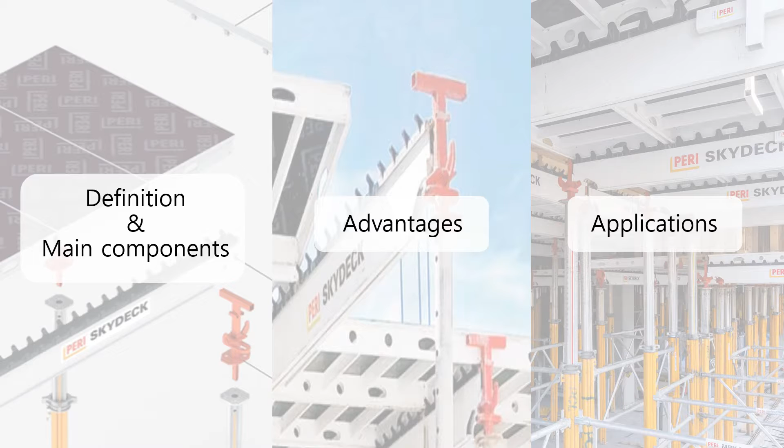In the first week's presentation, we investigated skydeck, one of the construction methods used when building. We studied the skydeck's definition, main components, advantages, and applications. However, the presentation focused only on what skydeck is, so we got feedback from the professor that we set the wrong direction.

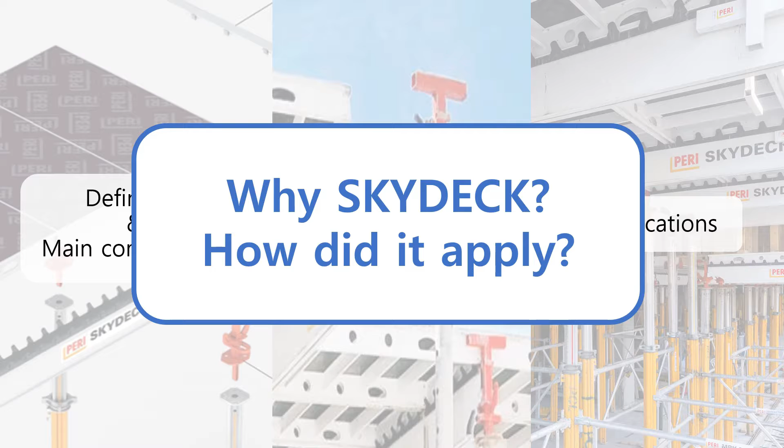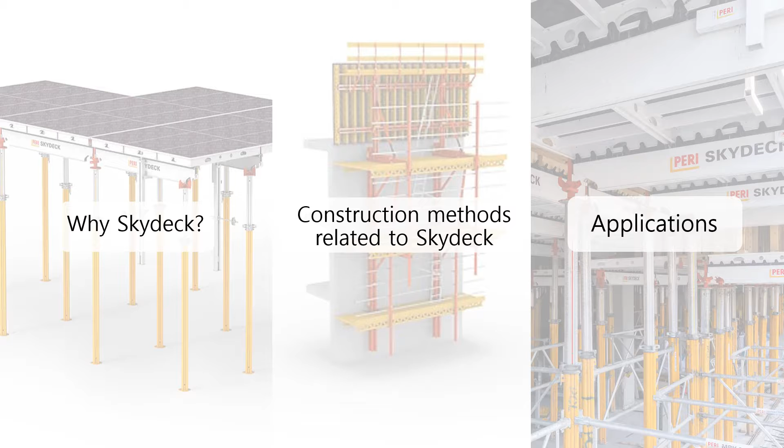So we are going to use this bonus week to find out why the structural engineers had to use construction methods related to skydeck and how they were applied in connection with the absolute world towers. So we changed the content to why skydeck had to be used and construction methods related to skydeck and how it is applied to the absolute world towers. Let's start this week's presentation.

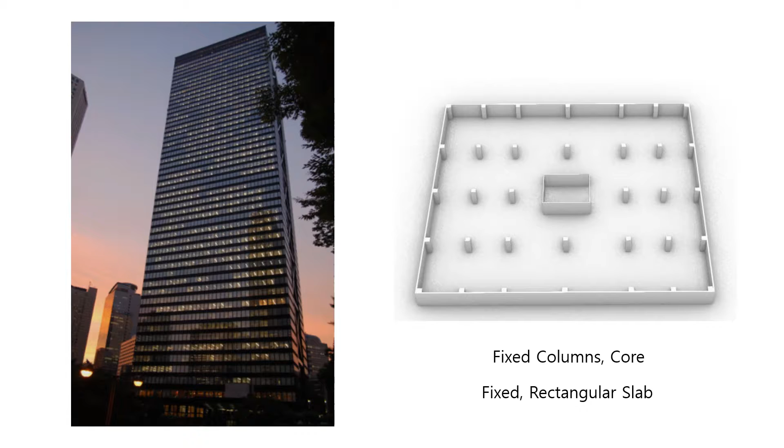Typical buildings have fixed columns and cores, and rectangular slabs are stacked up one layer without rotating. Usually when constructing slabs in these buildings, flying table techniques are often used. The flying table technique is to move slab molds with a crane.

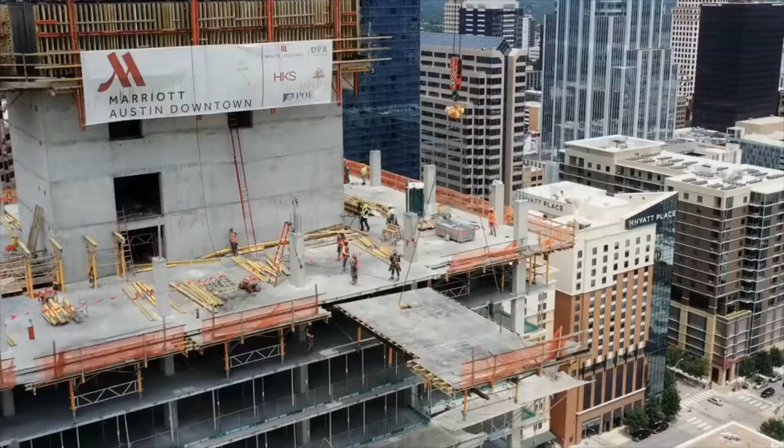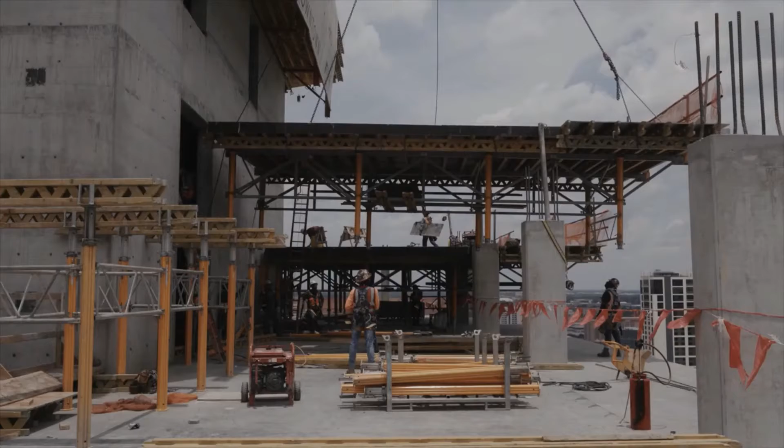However, the absolute world tower has fixed columns and cores, but it has an amorphous slab rotating structure. Engineers designed elliptical slabs so that all floors have different angles to create a building that looks flexible on the outside. As the layer goes up, the angle rotates, and the size of the angle is different.

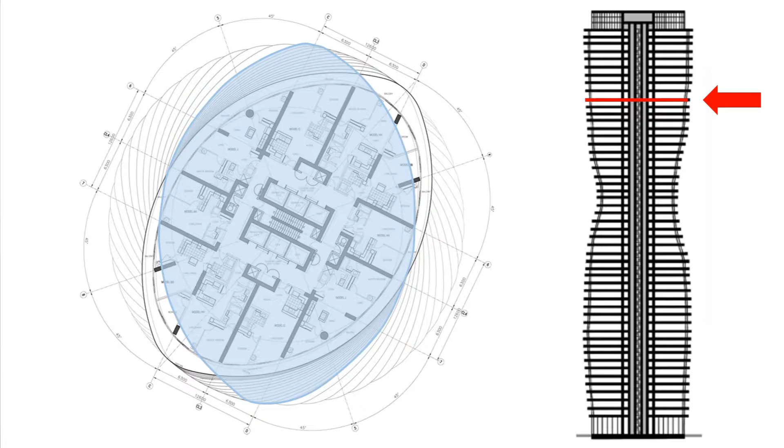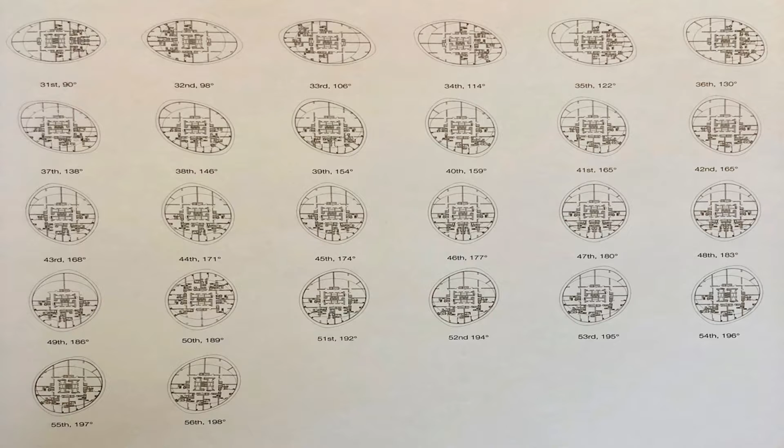Because every floor has a different angle, engineers had to set the exact angle for each floor to achieve structural stability before building. If this angle is slightly different during construction, there will be structural problems. The flying table technique, a common slab construction method, was not suitable for the Absolute World towers, which required a stable and accurate angle.

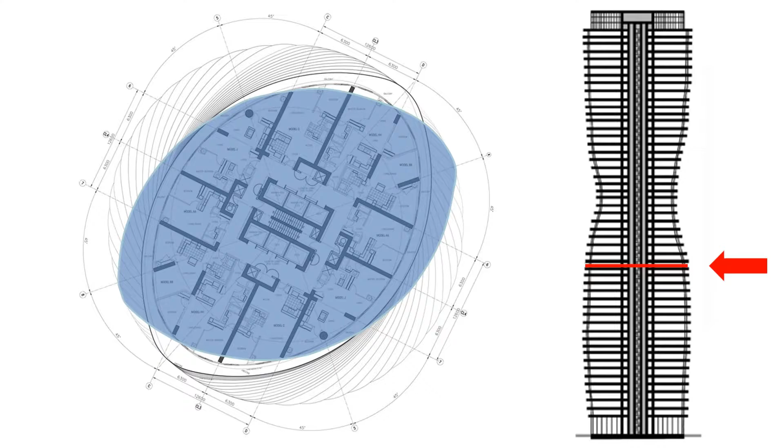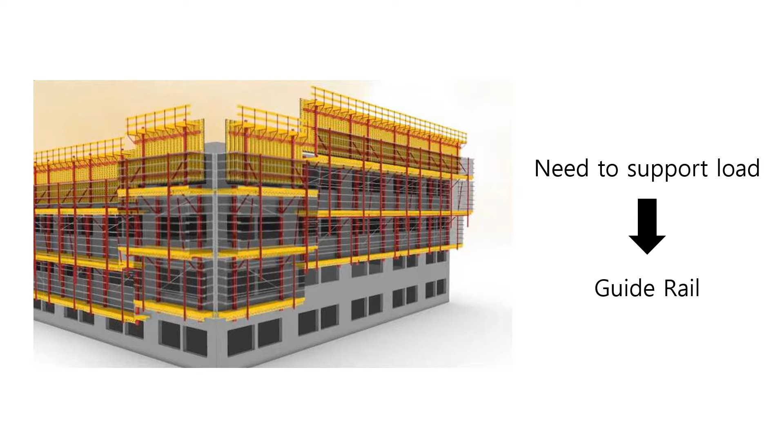Also, because slabs have different angles on all floors, there were parts that could not move the machine or support the mold during construction. That's why structural engineers needed guide rails so that they could move it at different angles, supporting the load on the machine or the mold.

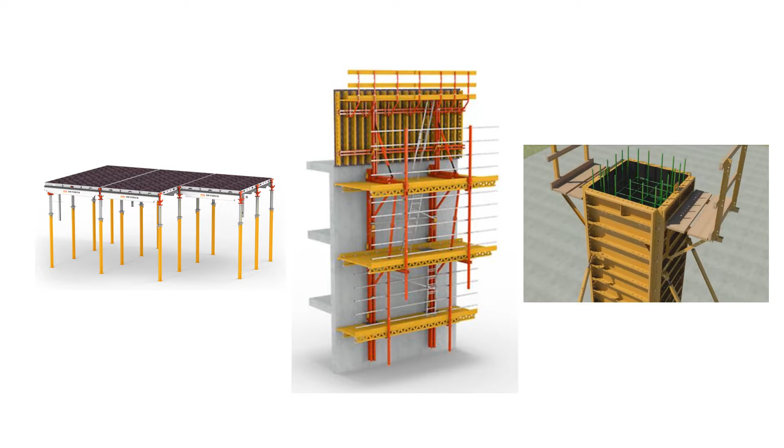How did structural engineers solve these problems? The answer was these three methods. These are the three construction methods that we studied this week. Let's take a look at each of them.

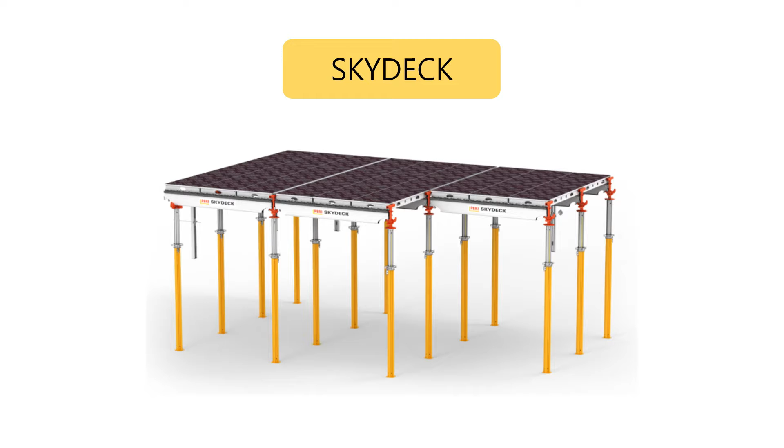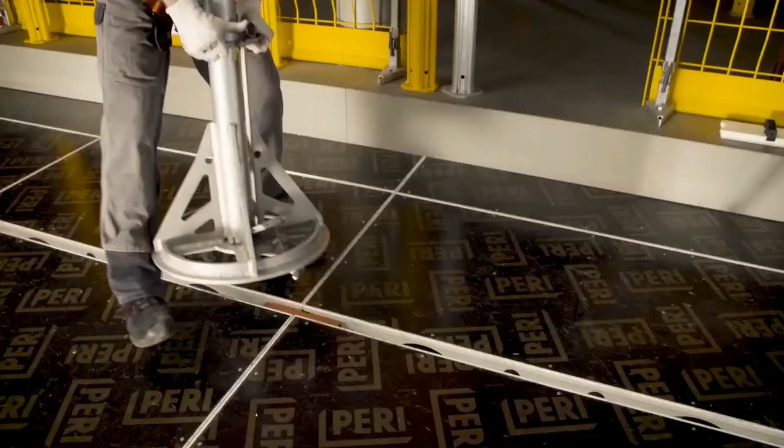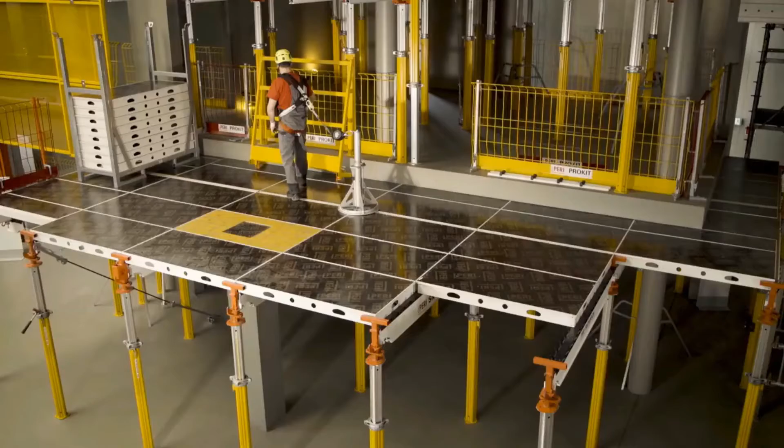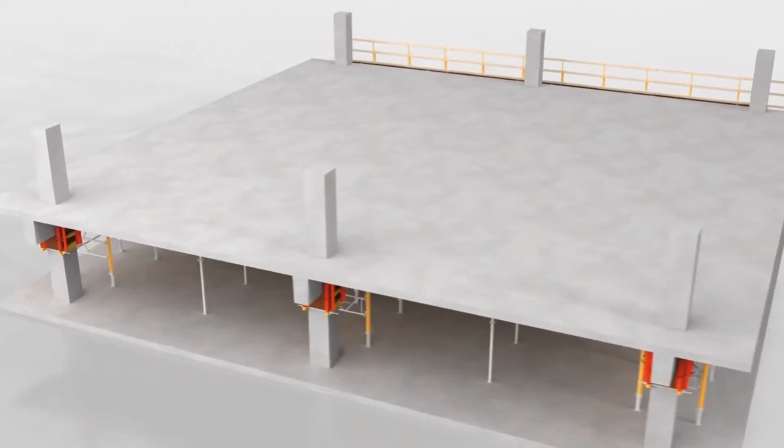First, the skydeck, a slab construction method. Skydeck manufacturers coat panels in advance. They assemble panels to fit the slab shape directly in the field, and pour the concrete on them. After hardening concrete, they disassemble panels and take them to the next floor to repeat the same task.

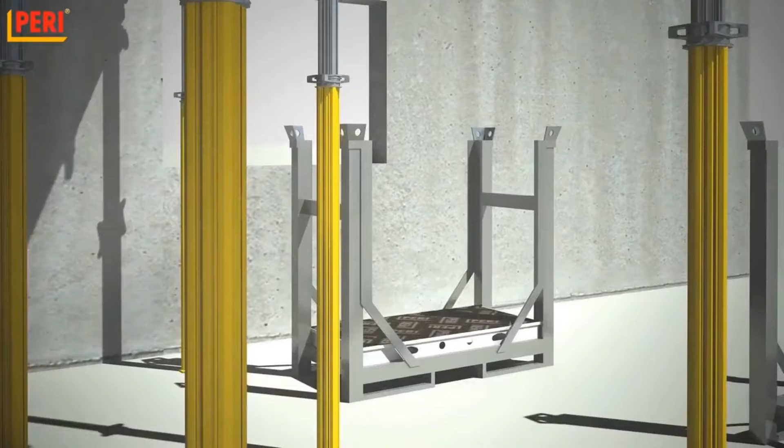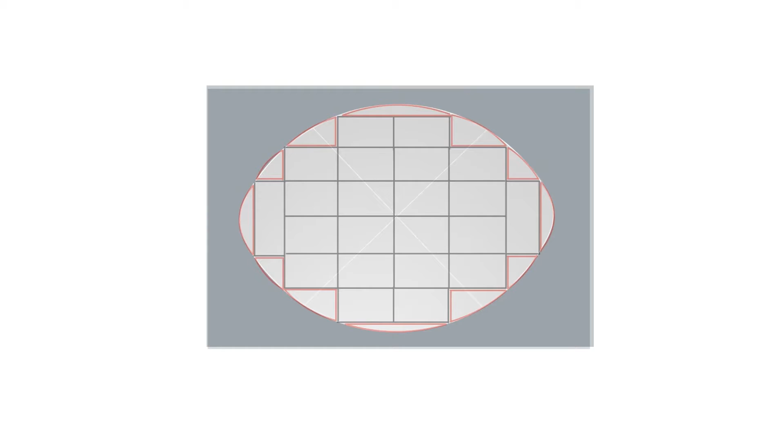The absolute world tower has an elliptical shape, so the panels look like this. They assemble most of them with standardized rectangular panels and fill the rest with specially made panels to match the shape.

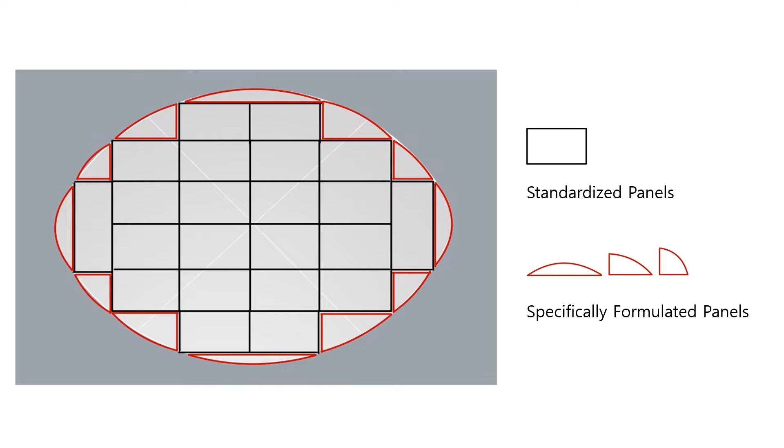The core and column are fixed, but the slab has an amorphous shape and rotates, which is difficult to construct, so it causes problems that take a long time to construct. However, by using Skydeck, they can shorten the construction period because it is easy to assemble and dismantle with standardized panels.

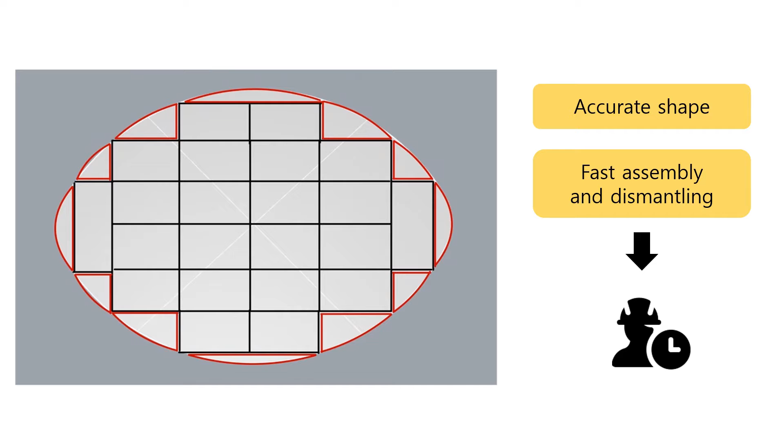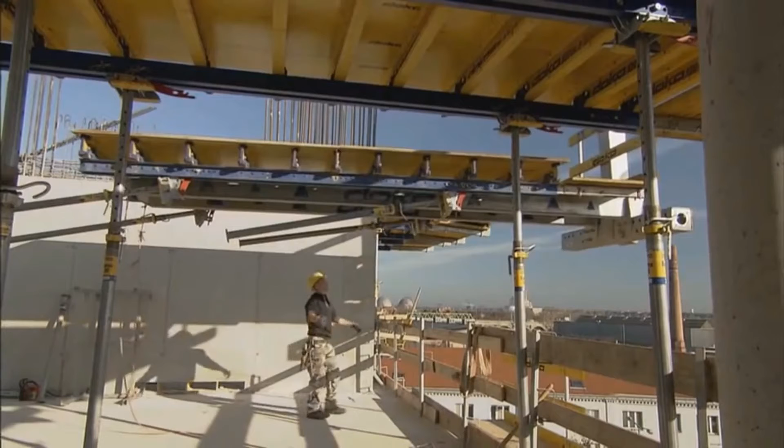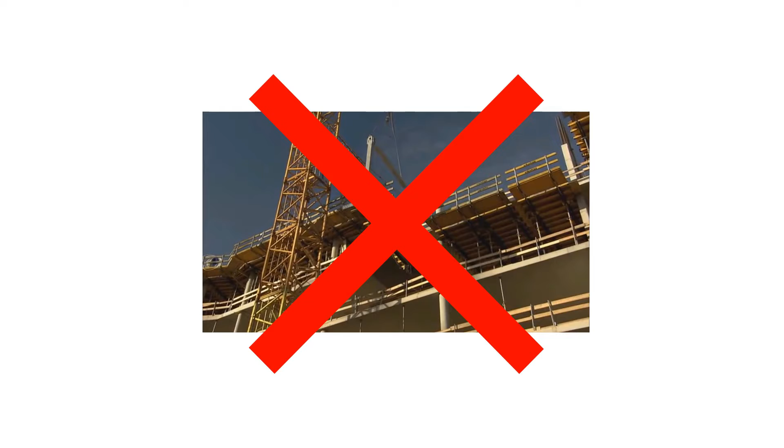Secondly, the RCS form construction method for wall construction. Normal fly tables use cranes, so it's not easy to adjust clear angles. Therefore, the absolute world towers use RCS form, which doesn't require a crane. It is operated by the interlocking climbing rail and shoe. Let's figure out the constructing process of the RCS form.

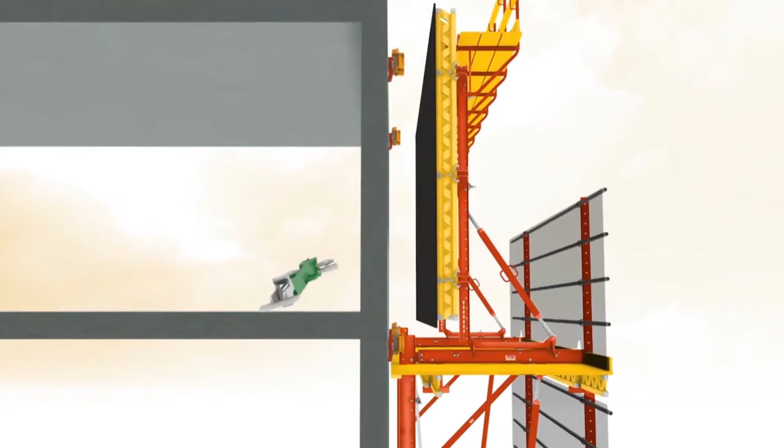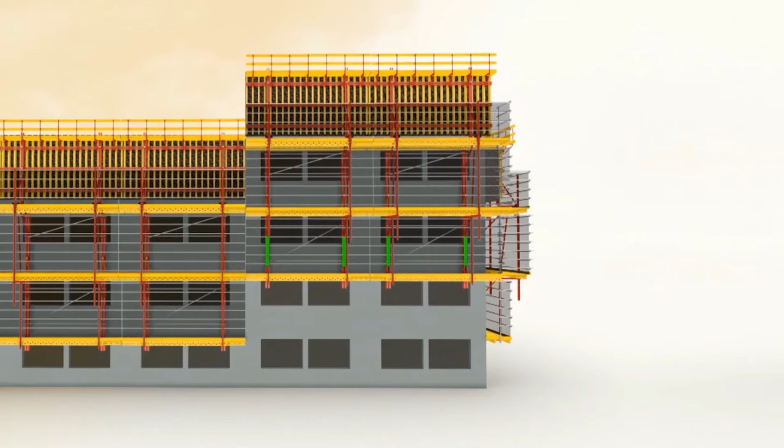The key point of the RCS form is the climbing rail. The climbing rail is attached to the form and helps the RCS form climb up to the next floor. The rails adjust the length of the struts themselves so that the form can rise one floor up. After one part climbs up the floor, the rail is detached from that part and attached to the next form. Using this method, the entire layer of form is moved so that the overall RCS form is raised.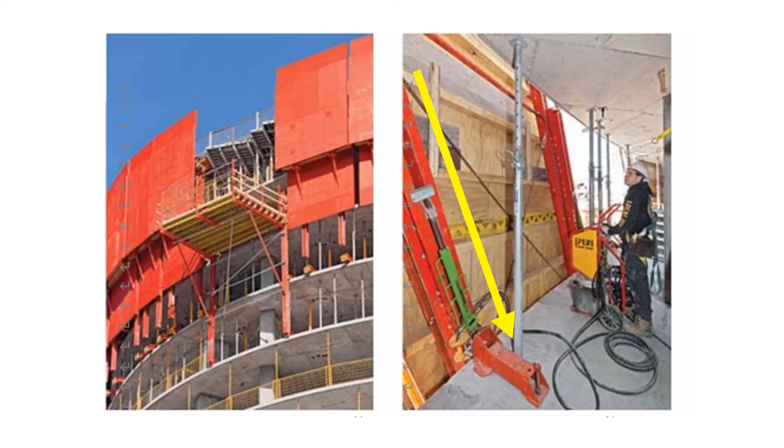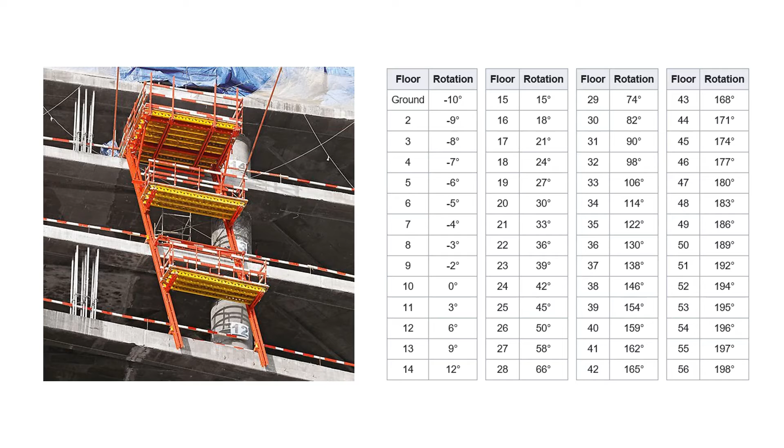And the most important reason why RCS form is used is that it can be stacked exactly at the right angle. Due to these advantages, RCS form is widely used in high-rise buildings characterized by helical structures and curves. For example, the Evolution Tower in Moscow, Russia also used RCS form. Therefore, the absolute world towers with different slab angles rotating on each layer were also able to implement the correct angle using RCS form.

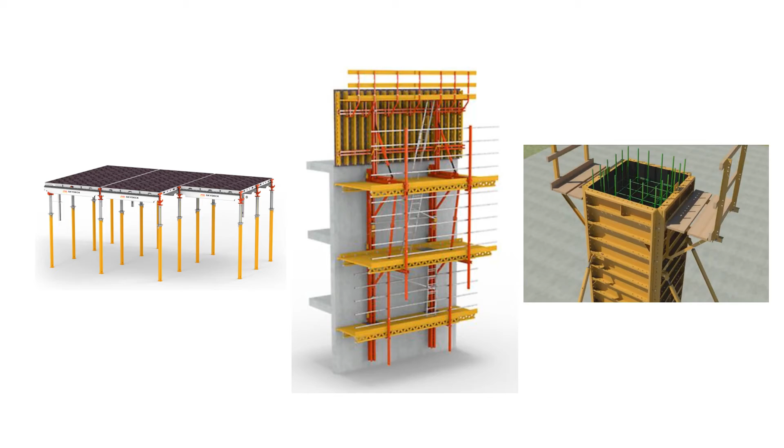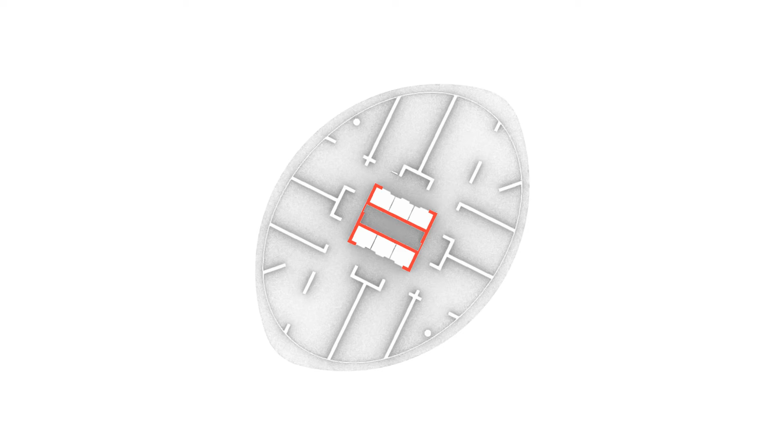Finally, EFCO, Climbing Elevator Formwork System, a construction method to make a core. Since the walls and slabs were completed with Skydeck and RCS form, core parts also needed to be stacked quickly at the speed of construction. In the case of the absolute world towers, the slab rotates, but the core rises steadily without rotating.

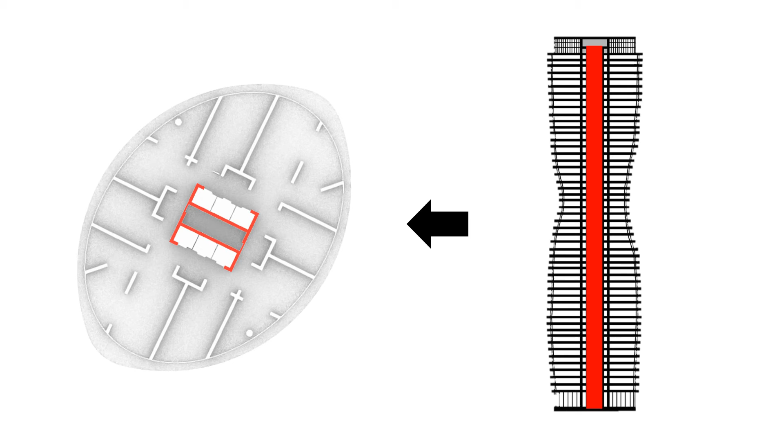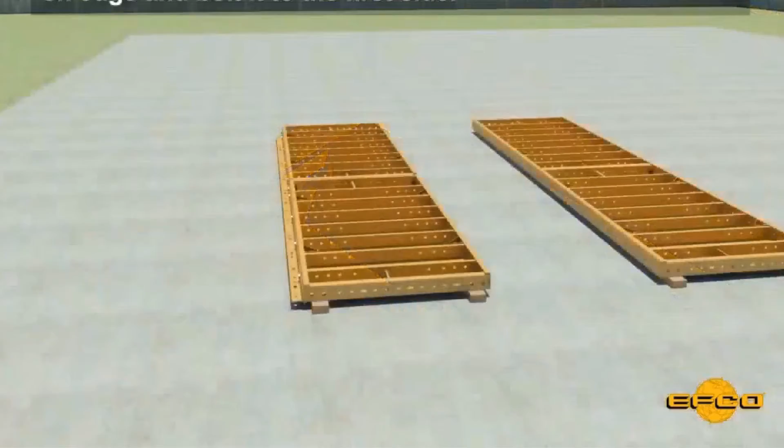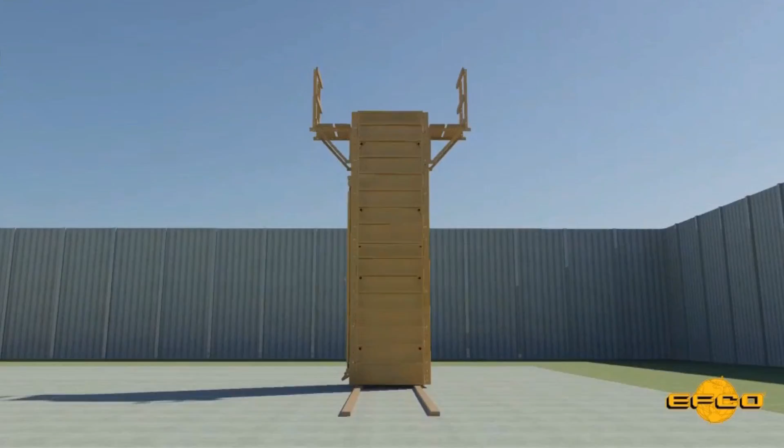Let's take a look at the construction process of EFCO applied to this building. It starts on the ground with the plate girder panels lying face side down, then turns the first side of the plate girder column over and bolts the second side to the first side. Next, erect the column forms and fix them to the ground. Finally, carefully pour concrete into the form.

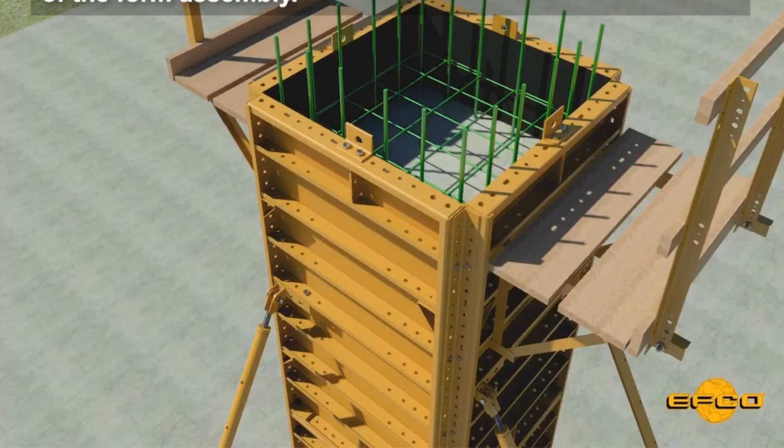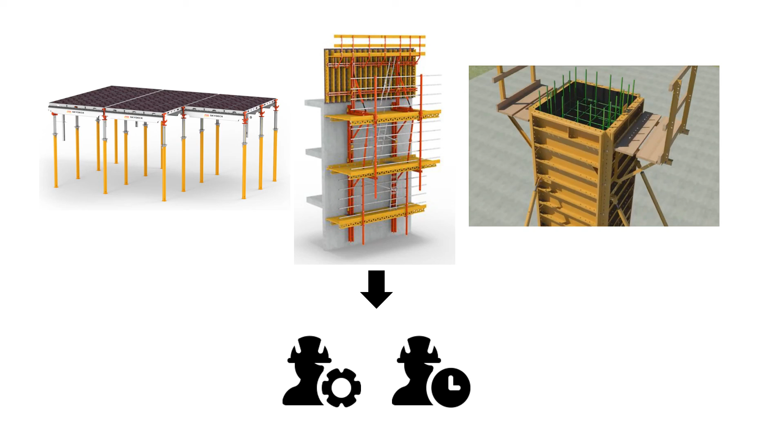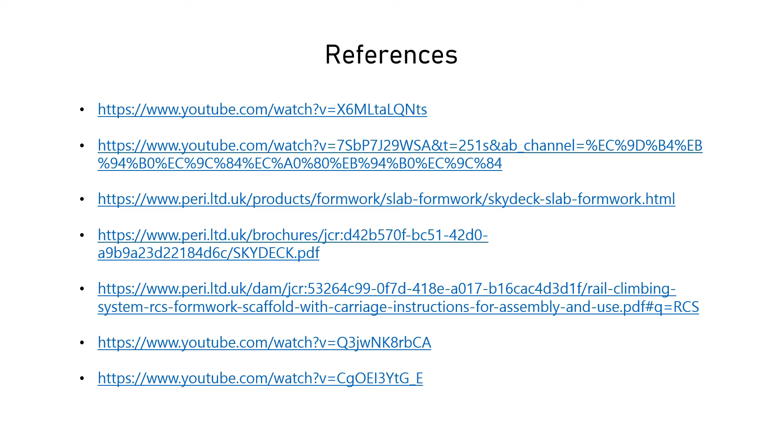With these three techniques, the special shape of the absolute world tower could be implemented accurately and quickly. These are the references of this presentation. Thank you for watching.